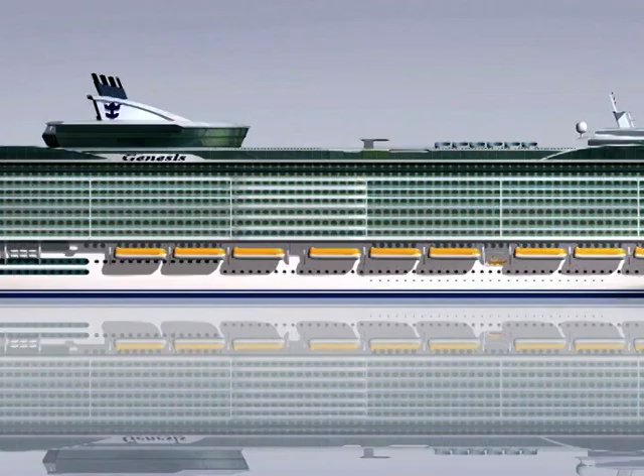The project departments of most major shipyards have already established concepts for the next generation of ships. But what will the vessels to be launched decades from now look like? What kind of floating structures are good new building prospects for the European shipbuilding industry?

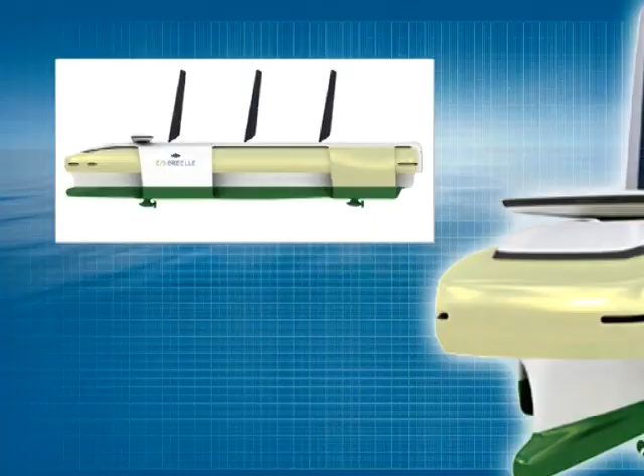What types of know-how and technologies will have to be developed to build such vessels and structures? How will these futuristic designs meet the anticipated challenges? These questions about future European shipbuilding, bundled with commercial scenarios, provide the impetus for future maritime knowledge and designs.

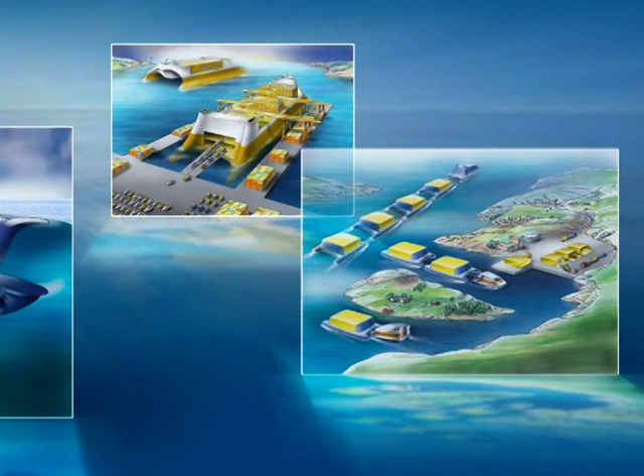To stimulate thinking about the far future and visionary concepts for ships and floating structures, a think tank for the European shipbuilding industry has been established with the support of the 6th Research Framework Programme of the European Union. This is the Visions Network of Excellence.

In a cyclic process, 10 to 20-year market and society scenarios are created each year by experts for 5 business areas. Based on these scenarios, students of the European maritime universities are invited to respond to the scenario challenges with project ideas, creating a European idea contest.

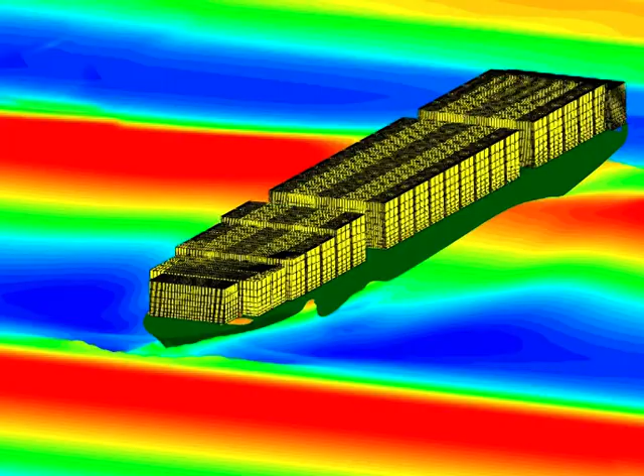The best ideas are shortlisted and validated by experts who evaluate the most interesting aspects of the proposed concepts in more depth. Finally, 3 winners will be selected by a high-level industry jury, and all ideas will be presented to the European shipbuilding industry, which may then further develop ideas with the teams on an individual basis.

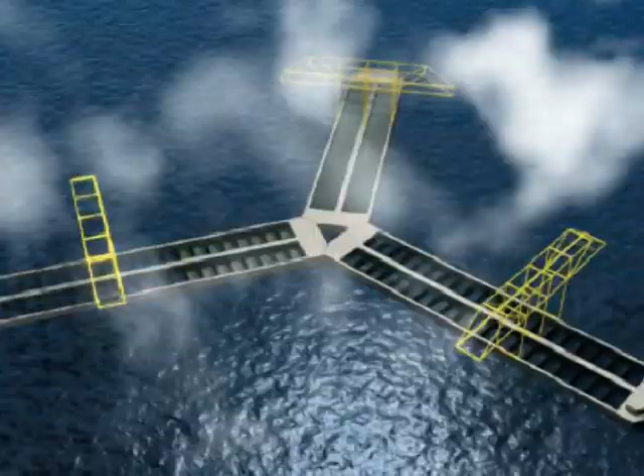Visions is managed and facilitated by industrial core partners who provide contacts to the business world. Visions links industry and maritime universities. With the Visions Network of Excellence, the European shipbuilding industry, kindly supported by the European Commission, has implemented a think tank to tackle far future challenges early enough to be prepared and set the pace, pairing the creativity of students with the expertise of specialists and industry management.

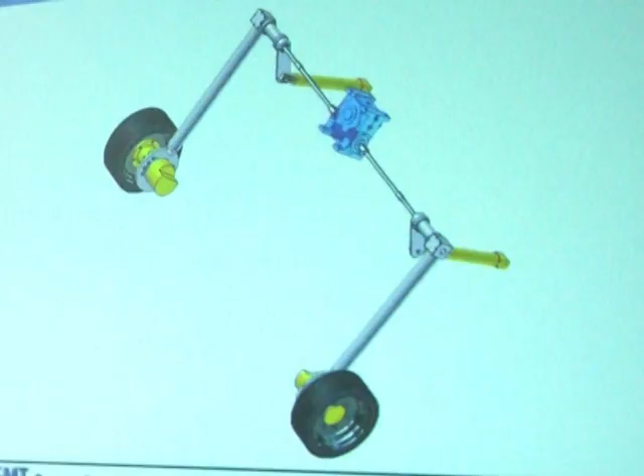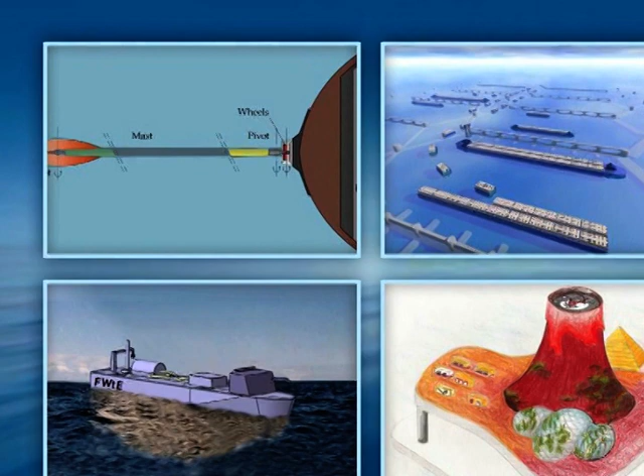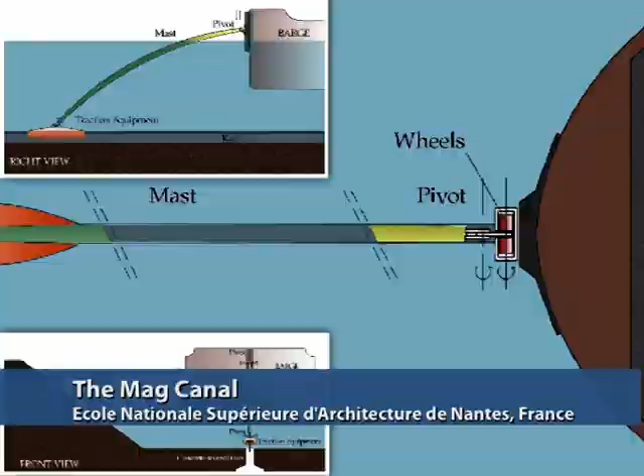In the 2008 contest, which was the 3rd ever done in Visions, 24 student teams from 8 countries submitted their ideas. The Visions partners selected 9 of the ideas for the shortlist, which then were evaluated by subject matter experts. Among the shortlisted ideas were the MAG Canal, a new propulsion system for inland waterways. Connect, a marine transportation system consisting of feeders, LDC and hub.

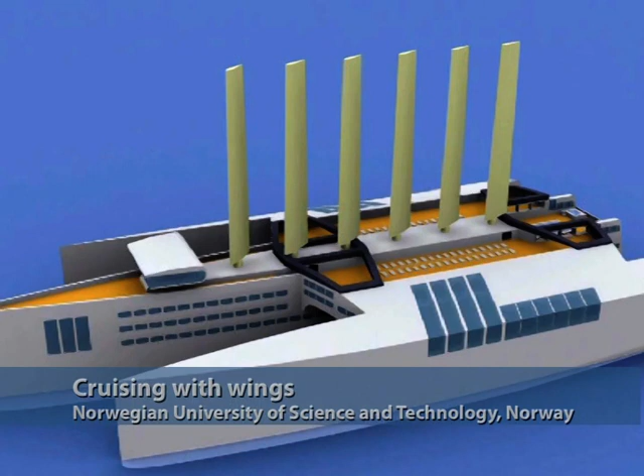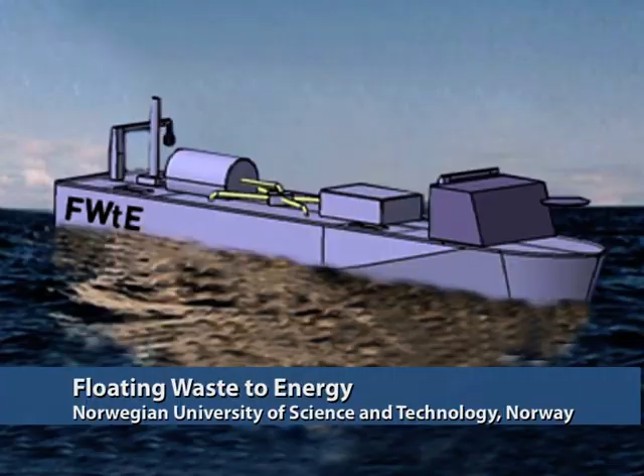Cruising with Wings, a trimaran-type sailing cruise ship. Floating Waste to Energy, a floating ship-shaped vessel for waste treatment. Anahita Island, a truly green holiday experience. Topless Hine Moana, a superstructureless tanker.

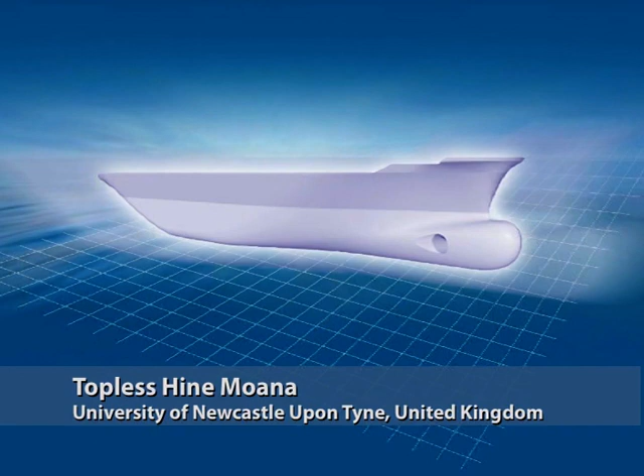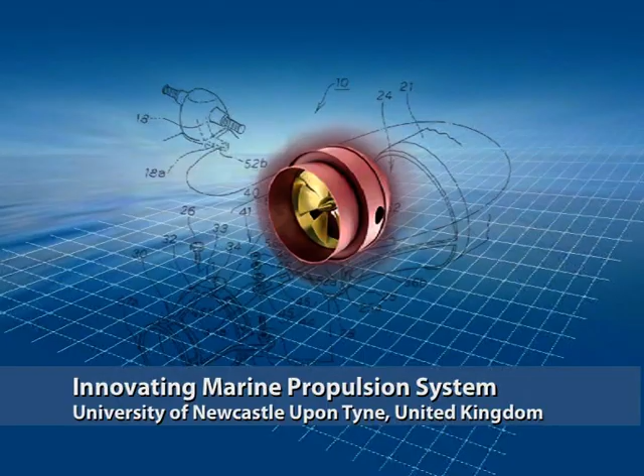Hydrogen production offshore structure, a jellyfish-shaped offshore structure. Innovating marine propulsion system, a redesign of an existing water jet propulsion system. Thermal offshore station, a structure for capturing and cultivating undersea freshwater. Out of these ideas, an independent high-level industry jury selected the 3 winners of the 2008 Cesa Smart Award, sponsored by Bureau Veritas.

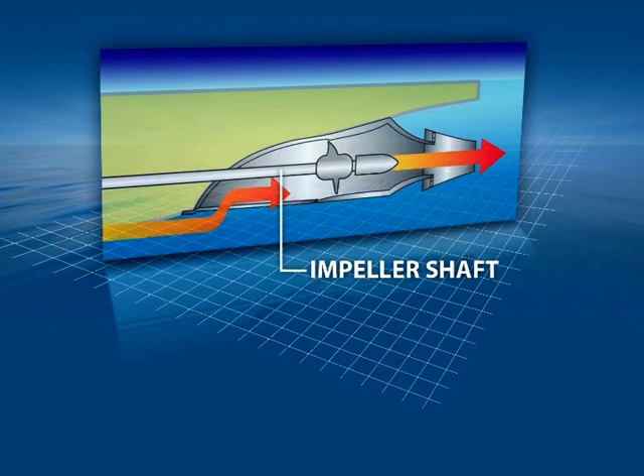A water jet is a well-proven device for the propulsion of high-speed ships. However, it is limited in efficiency due to vortices and turbulences inside the pump unit, as well as due to the reduction of jet stream area by the pump impeller shaft. The project aims to redesign this marine jet propulsion system. The main idea is to replace the pump by a rim drive.

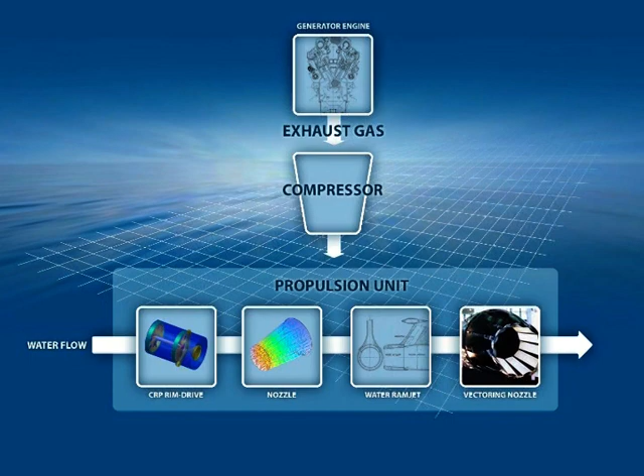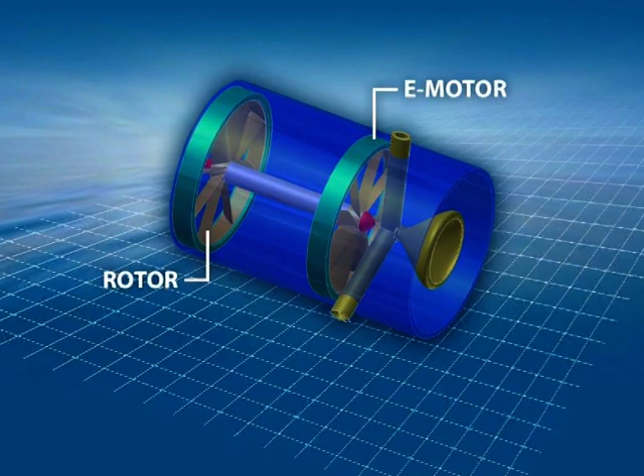The rim drive tunnel thruster is a fully integrated system combining electrical, mechanical and hydrodynamic elements. The electrical motor takes the form of a thin ring mounted in the tunnel. The stator carries the permanent magnet rotor in water-lubricated bearings, and the rotor is fitted with propeller blades that point inwards. With this innovative design, the inventors hope to achieve substantial advantages compared to a conventional water jet design. For instance, higher efficiency, lower engine emissions, better maneuverability and better redundancy.

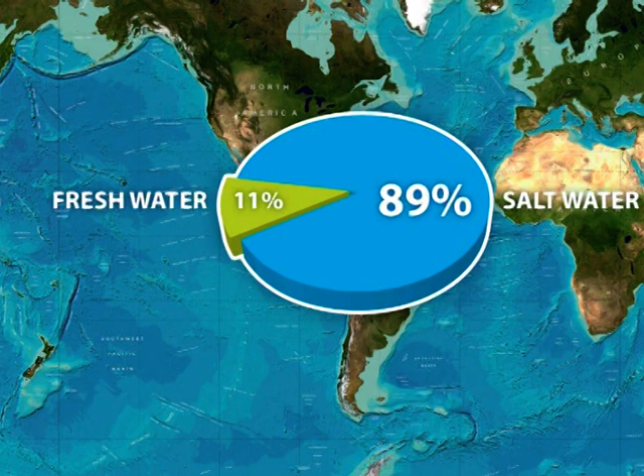Water is an essential element for all forms of life, including mankind. The world's population needs water for various purposes, such as agriculture, industry, household, and also for recreational and health activities. Most of the water on our planet, approximately 89%, is salt water. The most needed fresh water is a very limited resource, in particular considering that the human population will rapidly grow from 6 billion in 2000 to an estimated 9 billion in 2050.

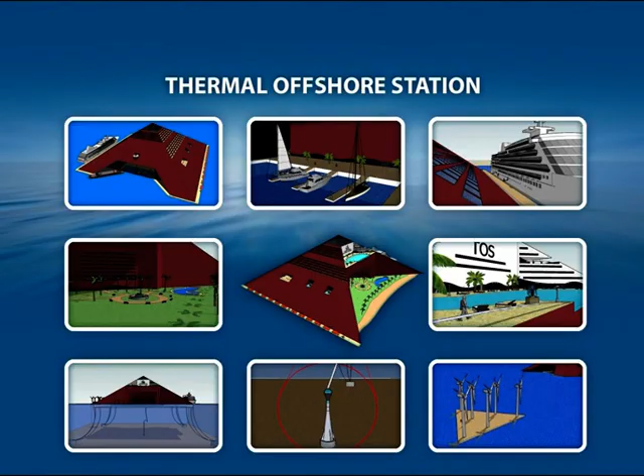Some years ago already, scientists discovered subsea sources of fresh water. Meanwhile, they have developed the knowledge to capture and cultivate such subsea water wells. The project proposes to design and install a large floating structure for the full-scale exploitation of suitable subsea freshwater sources. The so-called thermal offshore station, which is intended to be supplied completely by renewable resources, could be a future basis for marine freshwater production and shipping. But it could at the same time serve as a large floating wellness oasis, benefiting from the healthy thermal properties of the fresh water wells.

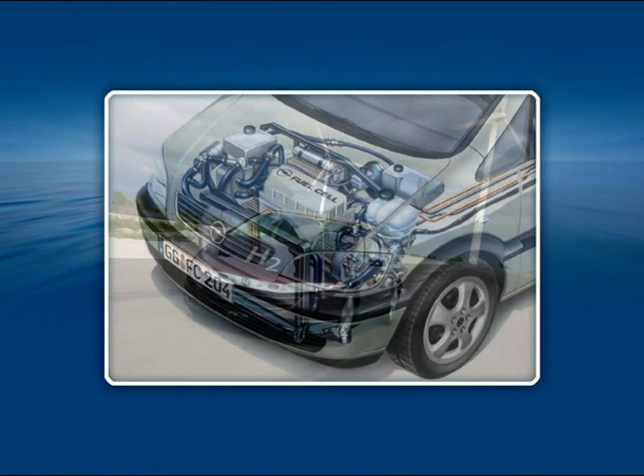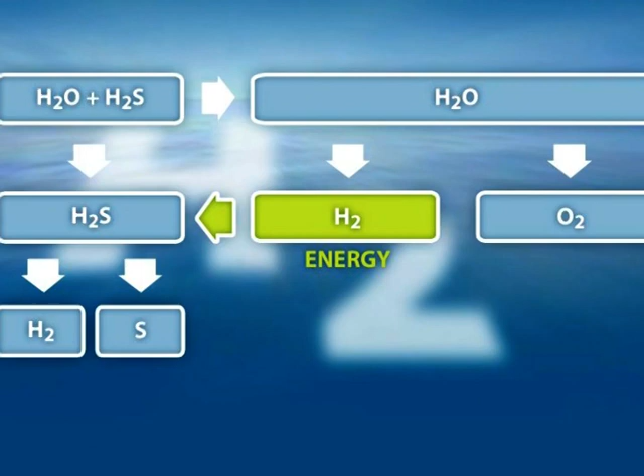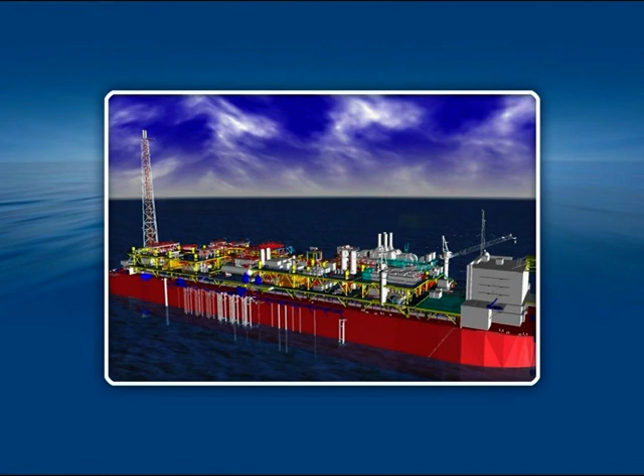Hydrogen is an important future energy carrier. Pure H2 is produced from water or hydrocarbons and hydrogen sulfide, which requires the availability of sufficient energy supply from other primary carriers such as oil, gas, coal, nuclear or renewable. Many primary resources for hydrogen production massively exist offshore in deep water, often around underwater oil and gas fields. The project proposes a circular-shaped offshore floating structure for the production of hydrogen close to subsea resources of raw materials.

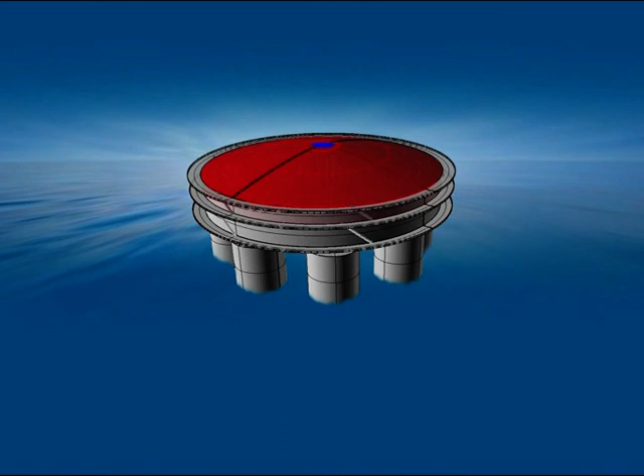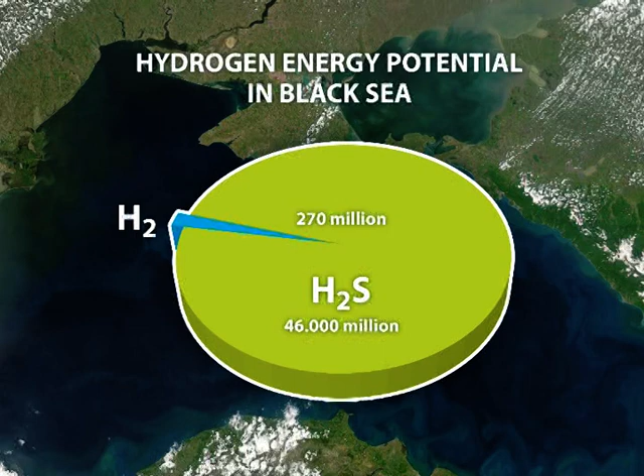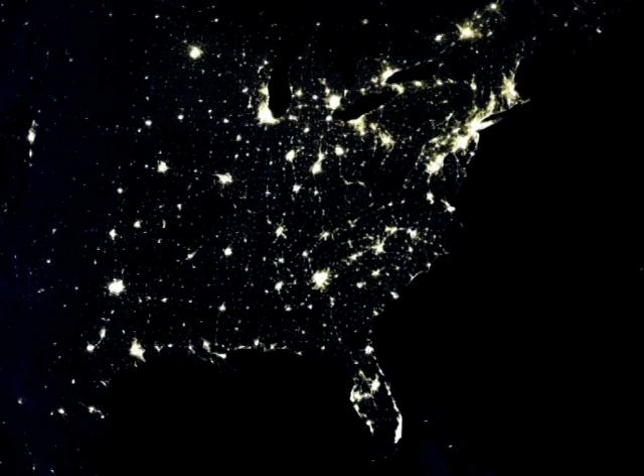The location is proposed to be in the Black Sea, where the total hydrogen energy potential is approximately 270 million tons, produced from 46 billion tons of hydrogen sulfide found in Black Sea deep waters. The hydrogen energy potential is equivalent to 1 year consumption of coal for production of district heat in Germany, or about 2 years of electrical energy consumption of the USA.

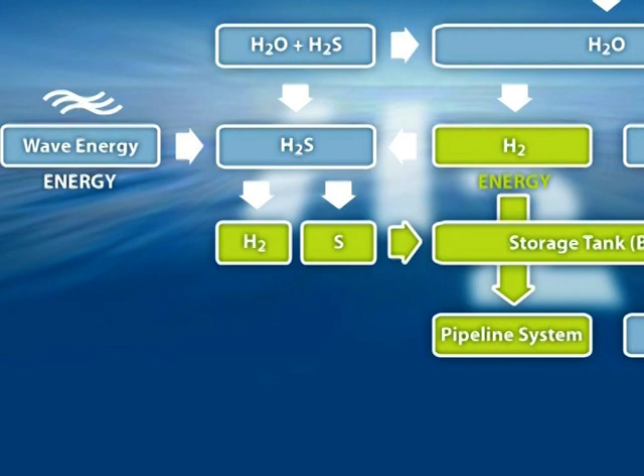The products produced on the platform are pure hydrogen, to be exported by pipeline, and sulfur, which will be stored in tank barges and shipped later. To enable the use of renewable sources for the process energy, the platform concept combines wave energy converters and solar panels for the necessary power generation.